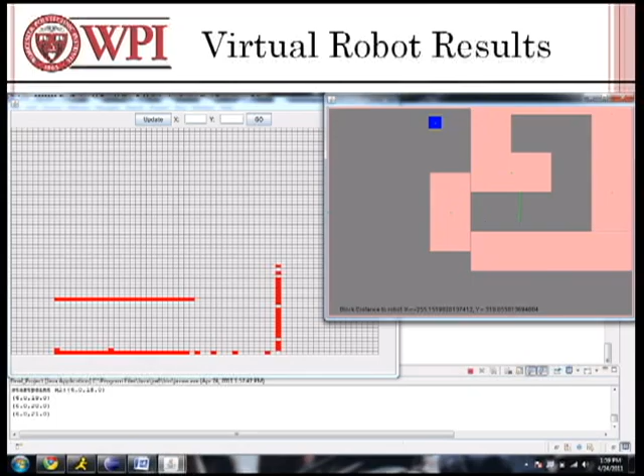We only read sonic values from less than 30 centimeters away. Within 30 centimeters of the robot, we had fairly accurate results, but further away, a lot of noise, and it became much harder to actually predict where we were. And then the grid cells changed because the size of the map changed.

All right, so here we can see the virtual robot results. As you'd expect, we have nearly perfectly straight lines, because everything in the virtual world works exactly perfectly, no sensor noise, etc. So here we can see the real results from the real robot.

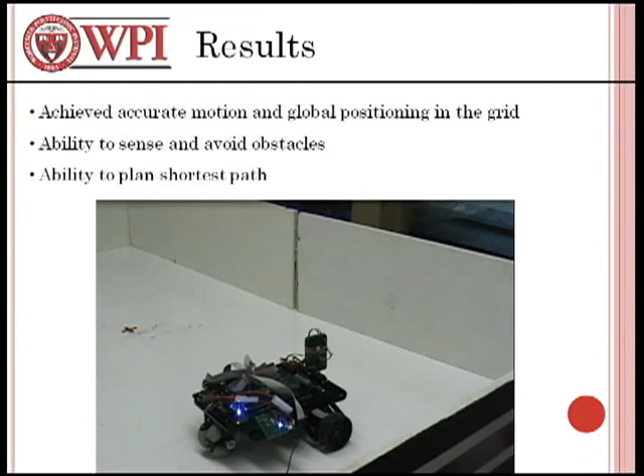So in conclusion, for our results, we achieved accurate motion and global positioning in the grid. We were able to navigate to our 5 waypoints, and we were able to plan the shortest path there and back.

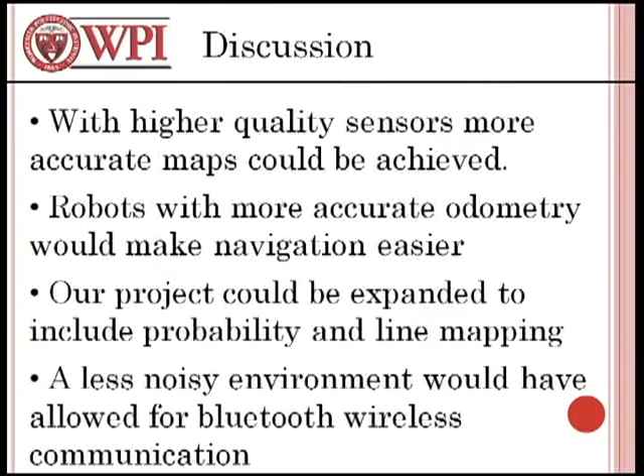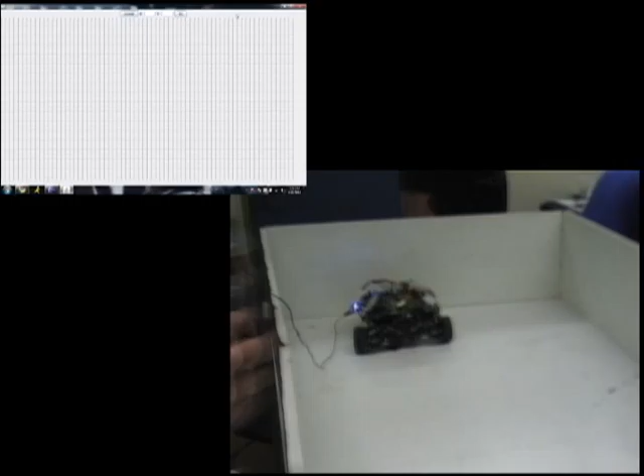I'd like to discuss some of the things we could do to make our results better. With higher quality sensors, more accurate maps could have been achieved. If our robot had more accurate odometry, we could have made for easier navigation. Our project also could have been expanded to include probability and line mapping, and also a less noisy environment would have allowed for us to use Bluetooth wireless communications instead of using a very long tether.

We'd now like to show you a video of the robot working, going from the beginning to the end of the maze and back. As you can see, in the upper left corner of the video, we have our GUI, which is running on our laptop, and the information from the robot is being sent to the GUI via the serial cable you can see in the video.

The map is getting updated every 3 grid squares the robot drives to, so that's 8 centimeters per grid square. And the reason the video is sped up is because the robot takes a pretty good amount of time to do sensor sweeps, which makes the overall process time consuming. You can see the robot is filling the map. It's only picking up values from less than 30 centimeters away, so we're getting a fairly accurate map, though we're not mapping too far in the future.

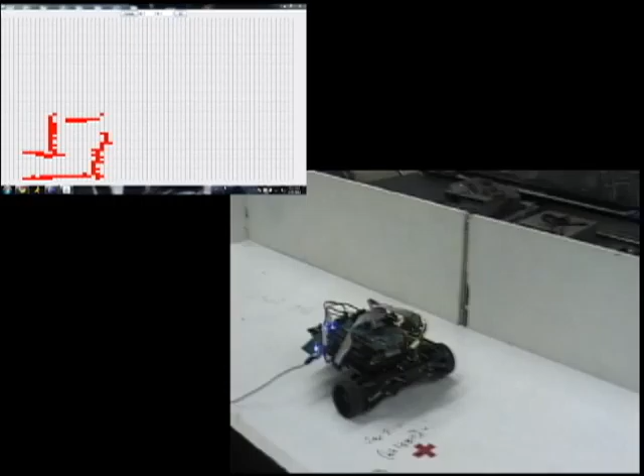And the robot is avoiding the obstacles, the walls, and going towards the waypoints, which you can see on the field are marked with the red X's, and it continues on its path planned by the wavefront algorithm. The wavefront algorithm is run every 3 steps. When you see the sensor sweep, it sweeps the sensor, runs the wavefront, and then sends the information to the computer via the serial cable, updates the GUI, and then drives the next 3 spaces and repeats the same process.